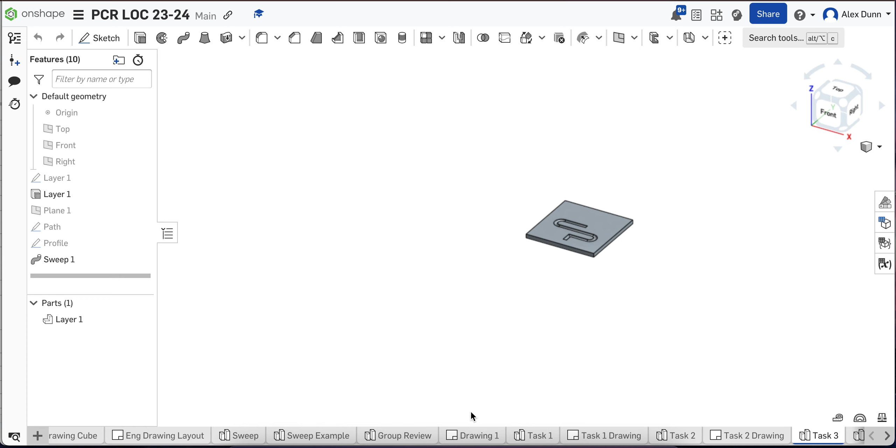Also going to do it in your Biomed to OnShape document we created earlier in the year. So you're going to come over and create a new part studio. You're going to name that part studio task 4. This task is going to greatly help you when you actually start modeling your LOC on OnShape.

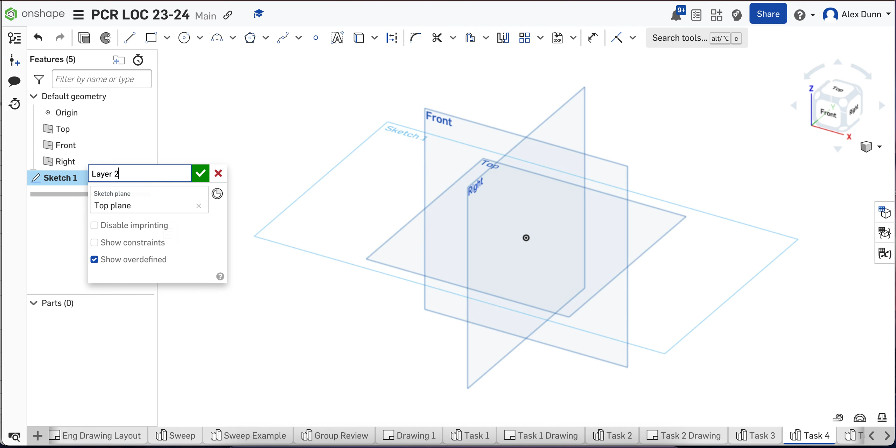So you're going to go ahead and make a new sketch on the top plane. We're going to name this layer 2. We're going to end up making a well connected to a channel, so we want it on the top plane. That's all happening in our second layer of our LOC.

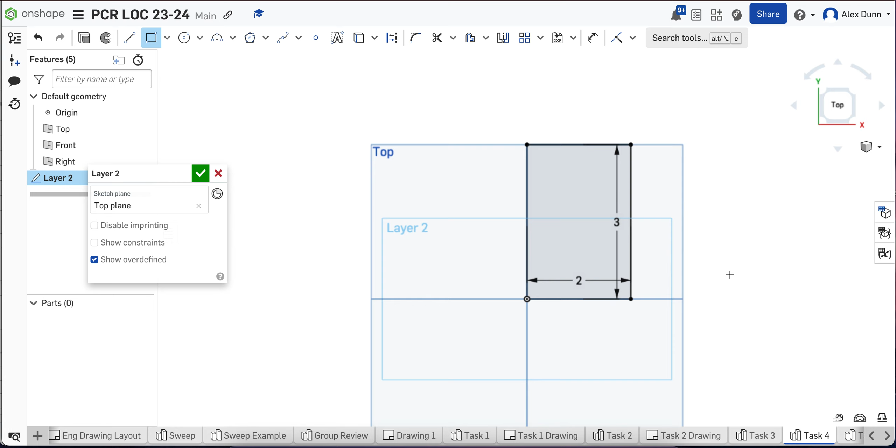I'm going to grab my corner rectangle starting at the origin and sweep out. I want it to be 2 inches by 3 inches. Then we're going to go ahead and extrude this. You should extrude it to 0.11 because that's the thickness of our layers for our LOC. I'm going to name that layer 2. Hit the green check.

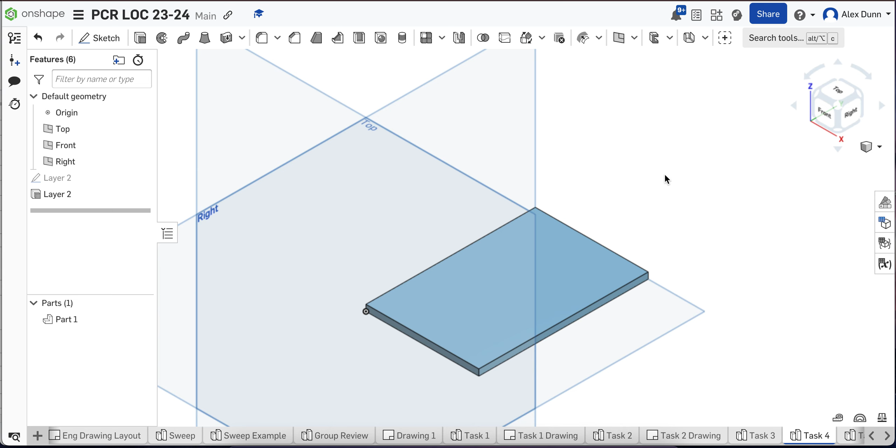Okay, so now we have our second layer. So now let's start making our well. We're going to make a new sketch on top of the layer we just created. I'm going to name this well 1. You should always number things. You're going to have multiple wells, multiple channels, so make sure you number them or label them accordingly.

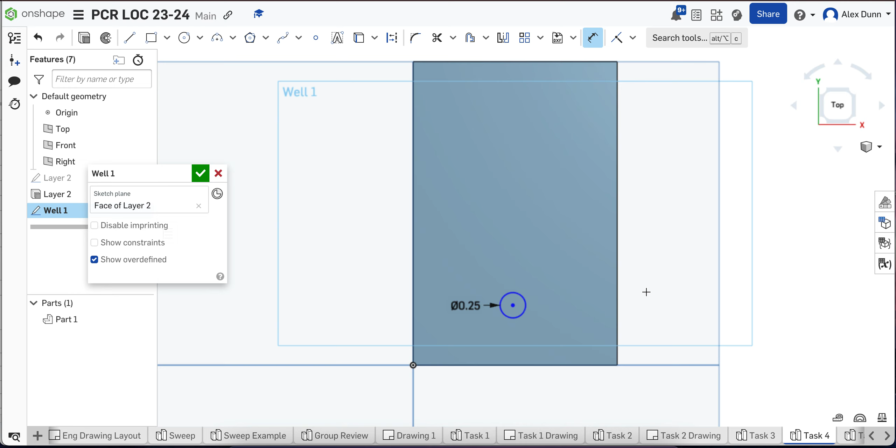My well is going to be a circle. Yours doesn't have to be a circle, but mine is. So I'm going to make a circle, and that circle is going to be 0.25 inches in diameter. I'm going to use my dimension tool, and I want this circle placed 1 inch from the side and 1 inch from the bottom of my layer.

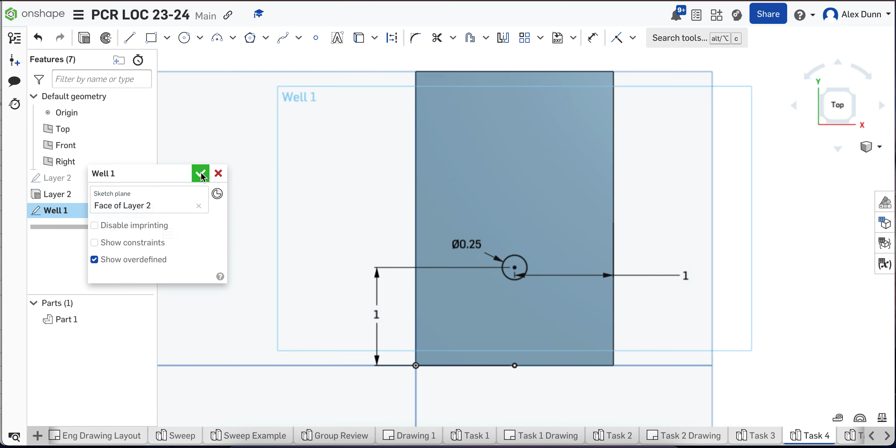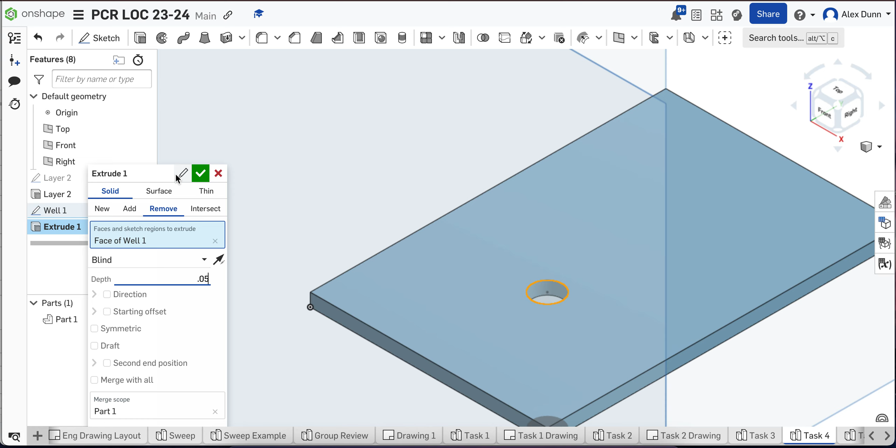So that's good to go. I'm going to hit the green check and go back to isometric view. I then need to extrude remove this circle slightly just to create my well. I don't want it going all the way through. Since the thickness of our layer is only 0.11, I'm going to extrude remove this to 0.05. I'll name this well 1 again. Green check.

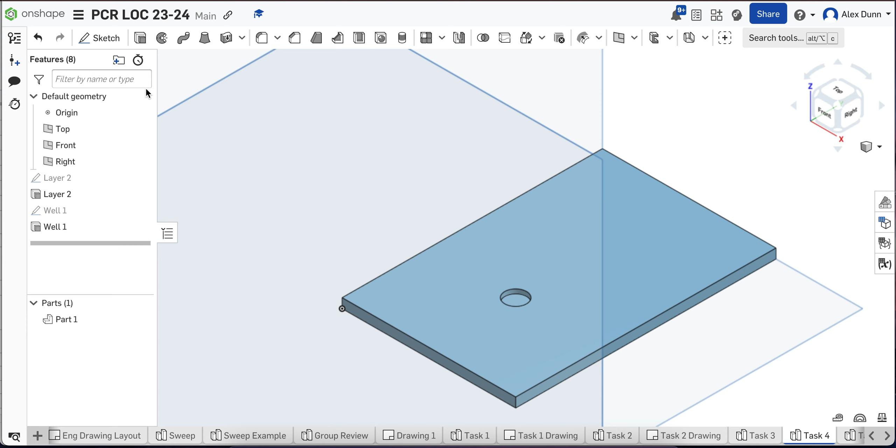Okay, so now we have our well. In order to create our channel, we need to sweep remove like we did in task 3. So we need a path sketch and a profile sketch. I am going to go ahead and make my path sketch first, on top of layer 2. I'm going to name this channel path.

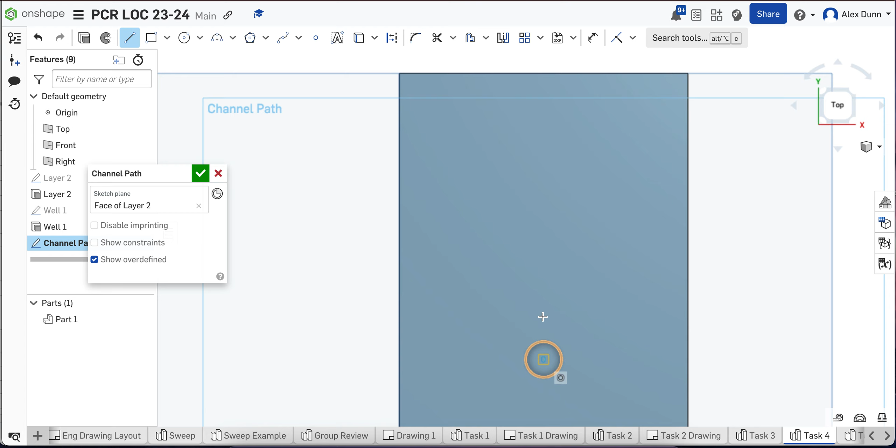My channel is just going to be a straight line just to keep things simple, starting at the center of my well and working out. Let's make that 1 inch as well.

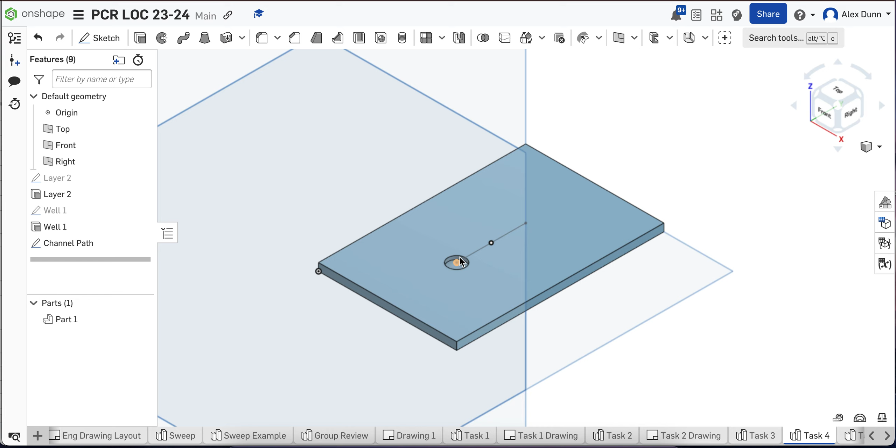Okay, so now that we have our path, we need to create our profile. We can't create the profile on the side of our layer 2 because we don't want our channel to start until the edge of this well, so we actually need to create a new plane. I'm going to go ahead and click the plane tool. For the plane point, I want my plane to intersect this end point of my channel path that we just drew.

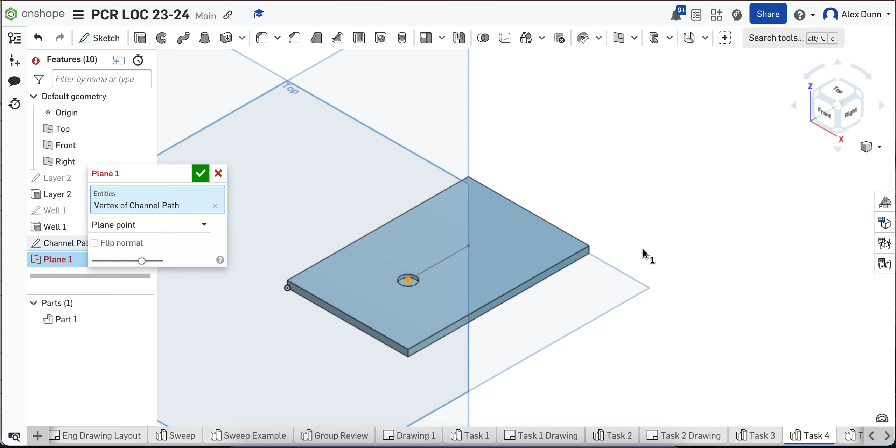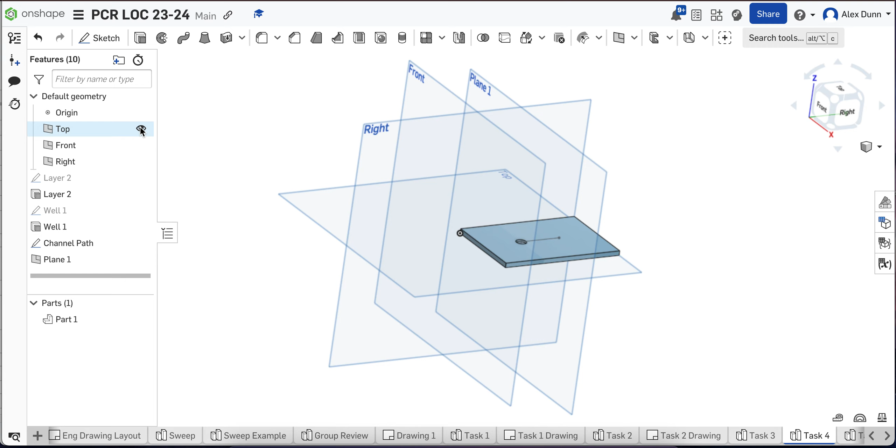We also need to select the front plane because it needs that as a reference. So you see that - I selected the vertex of my channel path, that little orange point there, and then I also selected the front plane to use as a reference to bump my new plane off of. I'm just going to keep this as plane 1. Hit the green check. I'm going to hide my other planes just so I don't get confused, so I know what I'm supposed to be clicking and drawing on. You see that plane intersects layer 2.

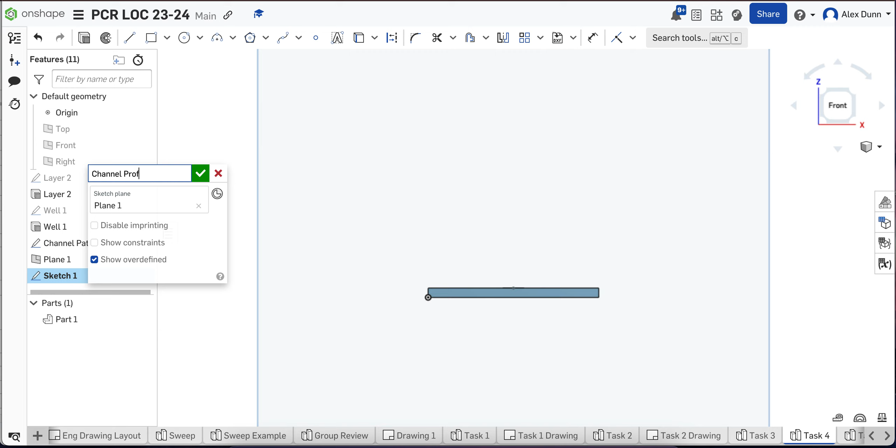I'm then going to make a new sketch on that plane, and that's going to be called channel profile. I am going to use a circle tool, and I'm going to reference that point that we've been talking about, and I'm going to make this a diameter of 0.1.

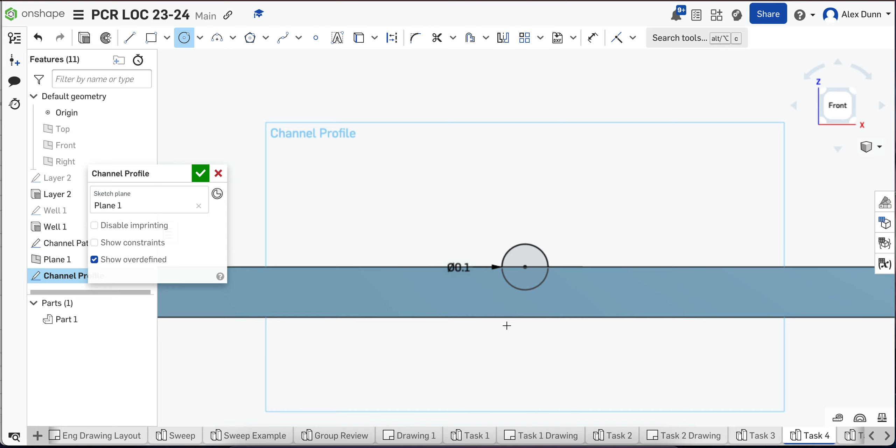I don't want it going all the way through my layer, but I want it to cut through the layer at some point. I'm not going to be sweeping a circle, I need to be sweeping a semicircle. So I'm going to go ahead and cut this circle in half. I'm going to trim the top of the circle, and I'm good to go.

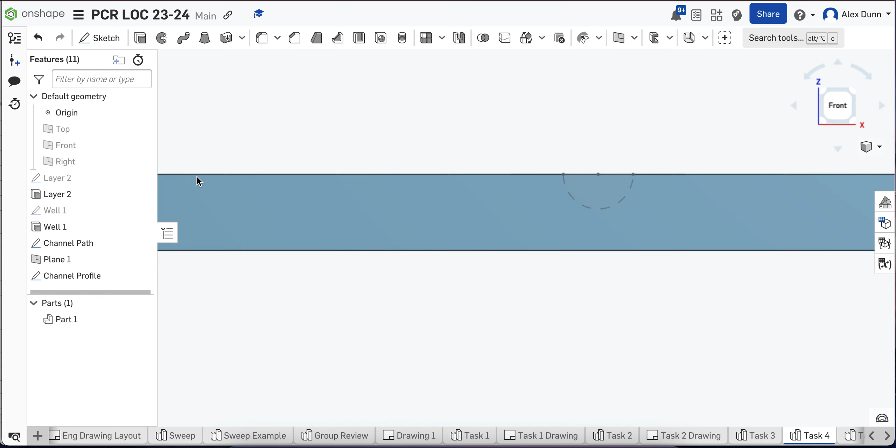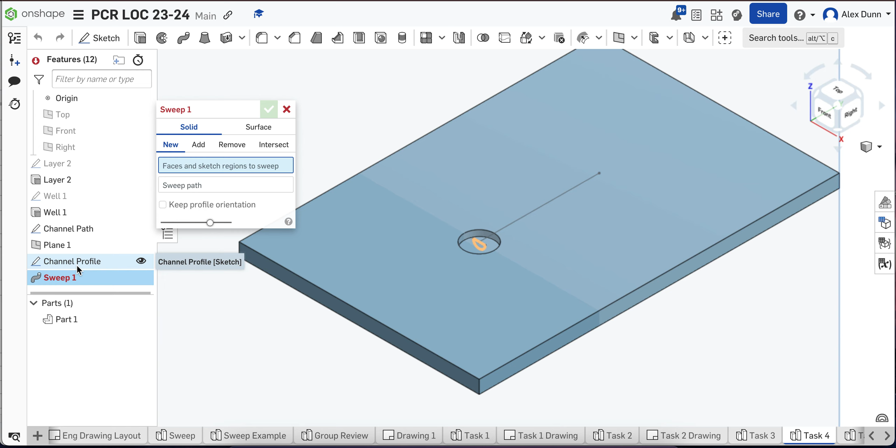Now you see there's a dashed line because that semicircle was drawn inside of something. So then I'm going to grab my sweep tool. The faces and sketch regions I want to sweep - that is your sweep profile, your channel profile - so I'm going to come over to my features list and choose the channel profile. The sweep path is going to be the line. I'm not adding, I'm removing. Hitting the green check, and then you have your well into a channel.